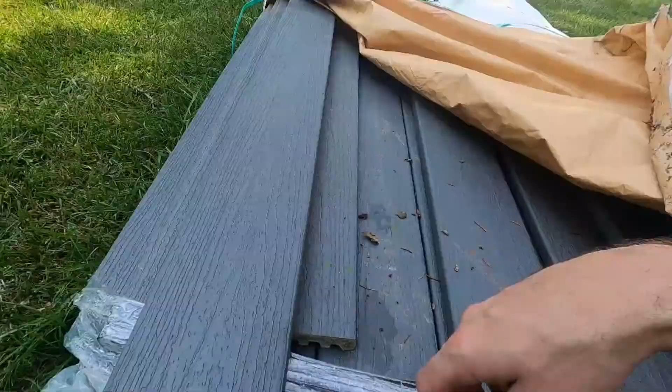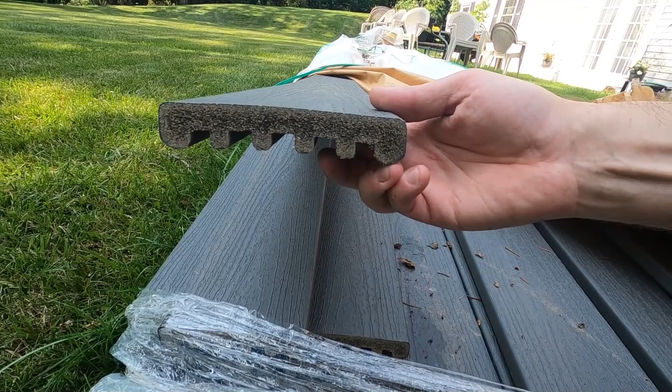Let me show you what that looks like. All right, this is the TREX decking. It does have this pattern on the bottom, so I have to be very careful about where I land things, making sure there's enough meat here to catch. I've got a big box of color-match screws. We're going to be face screwing this deck, since they did not want hidden fasteners.

So I'm probably going to do this in a couple different parts. Today I'm going to show you what's here, basically show you the framing, show you everything that's done correctly, and a couple things that I might tweak a little bit. Then the next video will be where we're actually putting it back together. They've already got most of the decking already ripped off, so I don't have to show you that.

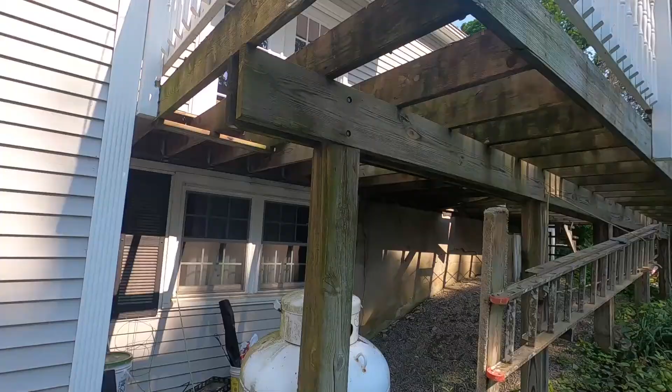So starting with the framing, this beam is okay. This is the way that they used to do it, where they notch it in on both sides. That's okay, but you lose a lot of strength when you span a distance. The way we do it nowadays is we notch it all the way in on one side and then bolt that all the way through. Then these two joists can be nailed together all the way through, making them even stronger than they are right now. So I'm not going to change that though.

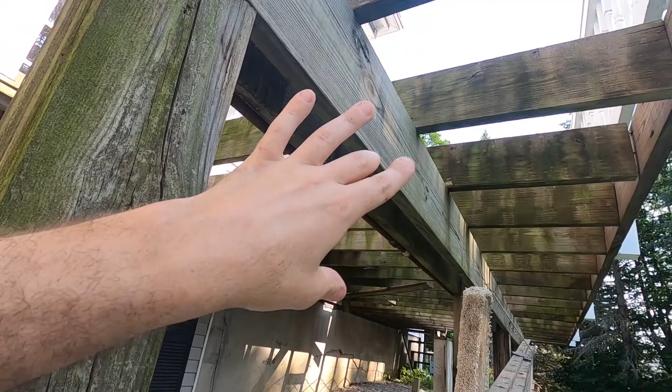This is plenty good. This deck's actually been here for 25 years. So the original deck went, well, let me show you. The original deck came to this splice here, and then they added that section on 9 years after the original deck. So from here over is apparently 25 years old, and this is a little less than that.

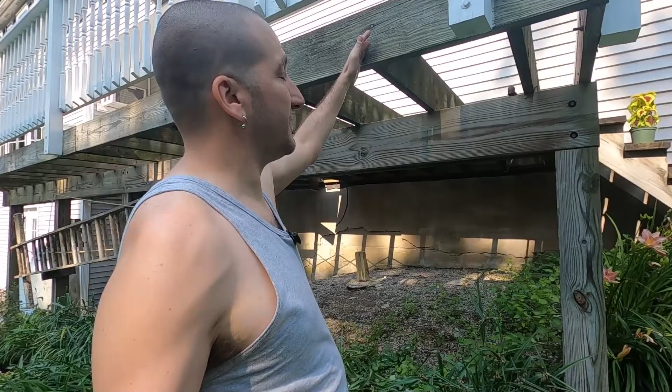What I'm gonna be doing is, because we're doing this out of TREX, this is staying for now, but down the road this is probably gonna get redone, the railings. So I'm going to build this out and run a trim board that's gonna run right over this, and the decking will come all the way out, because the way those ends of those boards are all groovy, I like to run a picture frame around the perimeter of the deck, and then you don't see all that stuff. I'll show you from up above what that's gonna look like. Basically I gotta frame all out in between all these, extend these joists by a few inches, put a board, and then run my trim board over top of that.

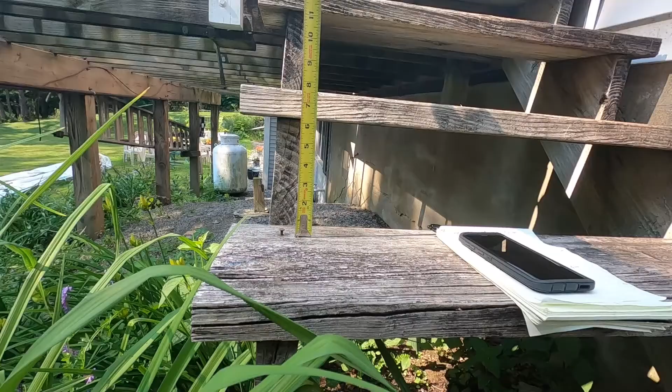Now these steps here, they don't meet code. They look like they're on a 45-degree angle, maybe a little bit less. So the steps themselves are a little narrow, they're only 9 1/4. We're gonna do 2 deck boards, which is gonna get us to 11 inches. And for the height, right now it's sitting almost at 8 inches, which is a little high, so we're gonna try to get that down closer to 7. The way this is built, the step is mounted to the deck, so it's actually flush with the decking, but really that should be down.

So when we rebuild it, I'm gonna have to frame something in down here to support it, and we're gonna drop this down so that there's a step down onto the first step.

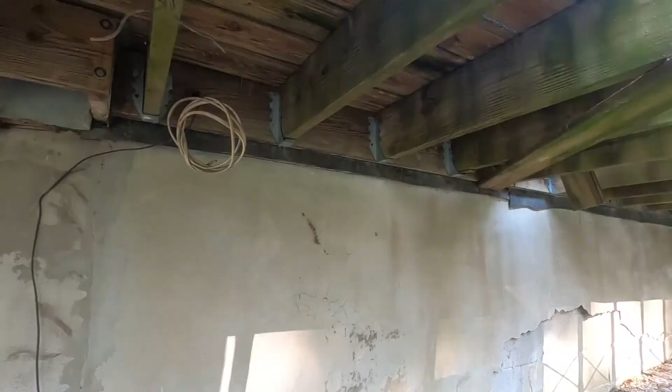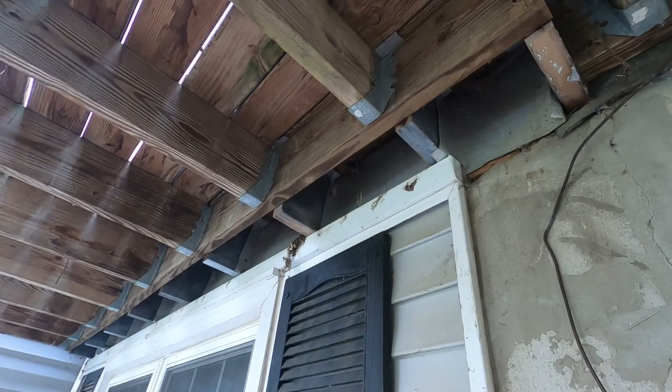This is a very strange section here. It looks like the floor joists of the house extend out, and then they attached a ledger on. So I'm not 100% sure what's going on with that, but once I get the deck boards ripped off the rest of the way, we'll figure that out. And I might have to just extend a little more flashing over, I'm not sure.

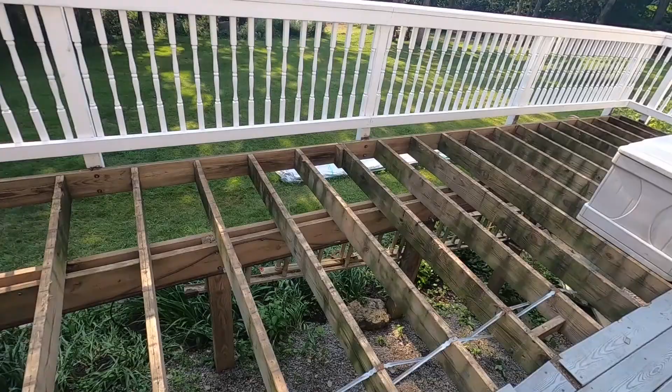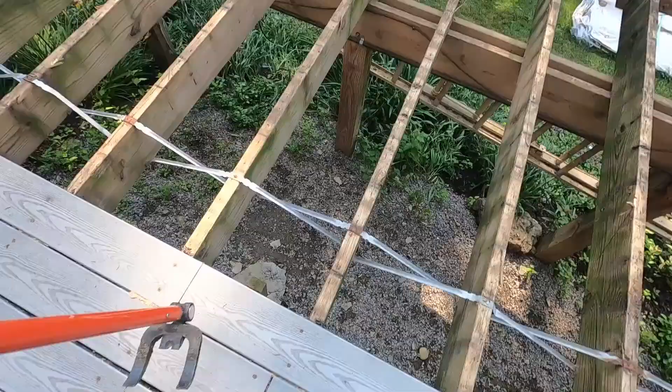All right, so here's what it looks like from up above. I was actually shocked that the joists are solid. So when they told me they wanted to redo this, resurface it, I was very skeptical, but looks like it's actually 100% doable. And if you've never seen one of these tools, they're pretty amazing.

You get it underneath the deck, and then you just pull and you'll just rip that deck board right up. This one in particular, the brand is Crescent.

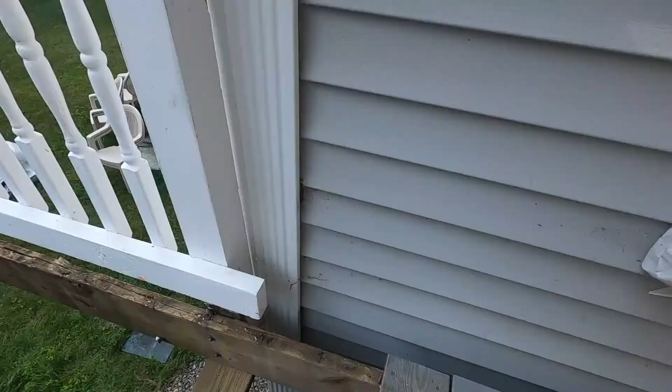And over here, the joist stops before the house. And because I'm gonna run a picture frame around, which is going to basically go right there, and then the main deck boards are gonna land ending right at the posts. So this picture frame is gonna carry through here.

So we're gonna have to tack on a couple pieces of 2x4, frame this out so that it will hold that piece. But there's no weight on this or anything, it's just gotta hold that from being able to fall in. So you can see they have some metal straps here for supports, but they don't go the whole way down. So I'm actually gonna take those out and put in full blocking, full 2x8 blocking all the way down, and that will really help stiffen up this deck a lot.

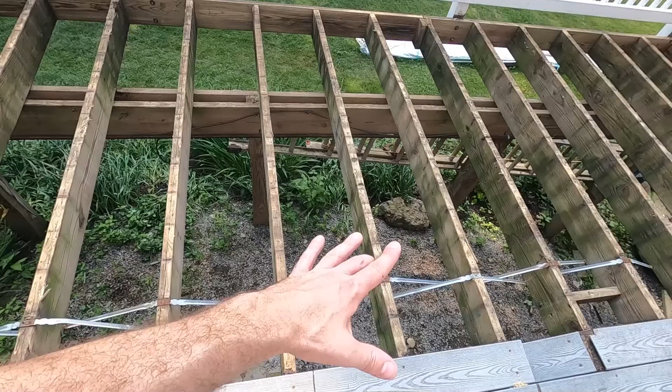All right, I think that's all I've got to show you here. Let's head back to the office, and I'm gonna draw up how I'm gonna frame out the outside so you can see what that looks like.

All right, I'm in the office. I'm gonna show you these drawings, exactly how I'm gonna do this, and try to explain it a little better. It'll make more sense in the videos when you actually get to see it happening, but let me just show you the drawings right now.

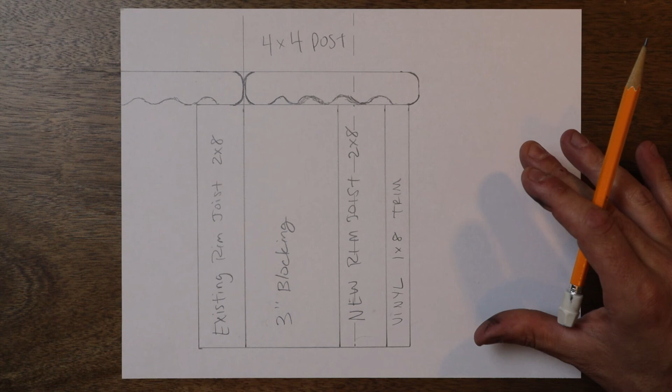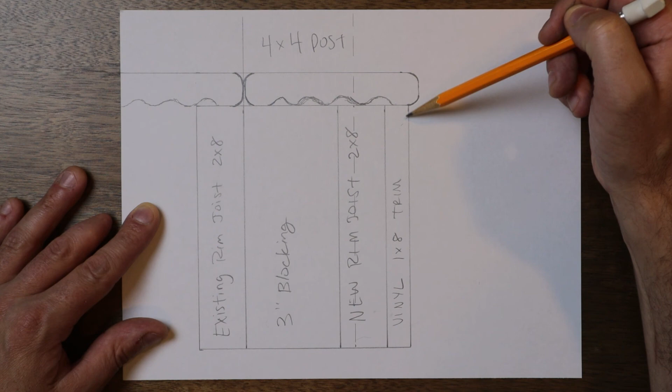Basically, here is the existing rim joist of the deck and the 4x4 post. So in order to get a deck board, what I'm doing is I'm picture framing the entire outside of the deck. So in order to get the new deck board to land exactly so that edge lands exactly on the new trim board, I had to basically lay this out with a deck board, put a trim board on, and work my way backwards.

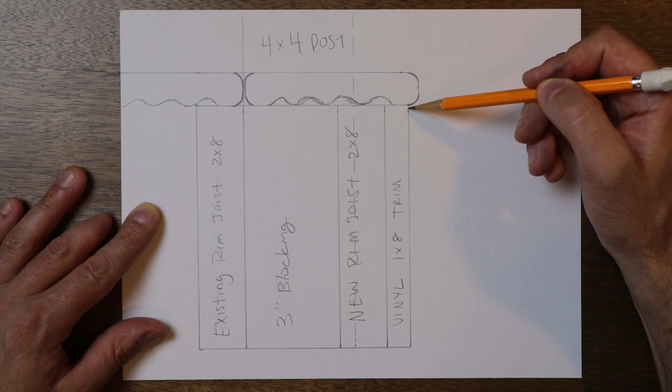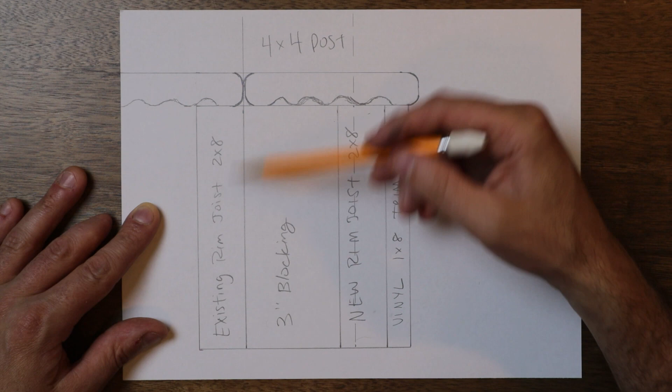So this, I forget what this was. I think it's a 1/4 inch here, and then a 3/4 inch board, and then a 2x8 new rim joist, and then a 3-inch block. So this is a 2x8, and then basically a 2x4 ripped to 3 inches. I'm actually gonna run it the opposite direction, because if you run the grain this way, it's just gonna split.

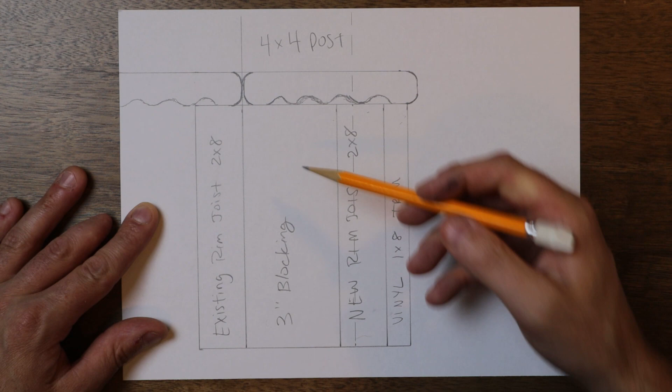So I'm going to use a 2x4, rip it to 3 inches, and then cut it to 7.5, and then a 2x8 and the trim board. That's what this is going to look like, blocked all out. I'll show you that when we do it, and that'll be in the next video, so check out the next video to see exactly what this looks like.

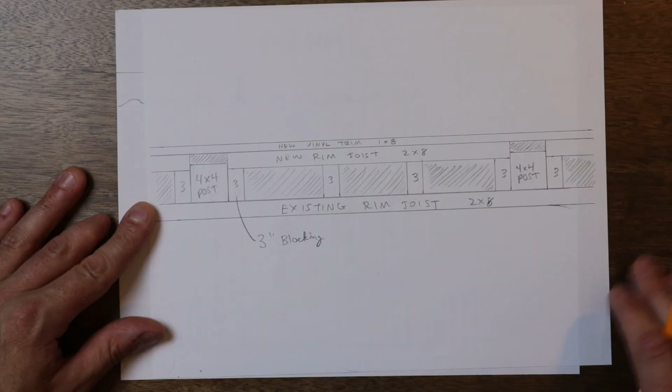Okay, so this is an overhead shot of the same thing. Here's a 4x4 post, and here's a 4x4 post, and this is the existing rim joist. So what I was talking about was putting a 3-inch block. This is a 2x4 ripped to 3 inches and cut to 7.5, so it matches this.

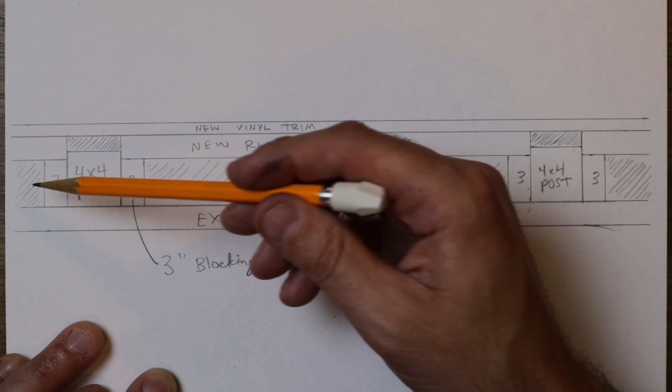And it's weird, the old ones are 7.5, the new ones are 7.25, so pressure treated framing's all over the place anyway. So it's going to be a 3-inch block, and then the new rim joist—you see here's a space, these darker spots are the spaces. So there's going to be a 3-inch block on either side of the post, and then the new rim joist and the vinyl trim. So the new deck board is going to span from here to here.

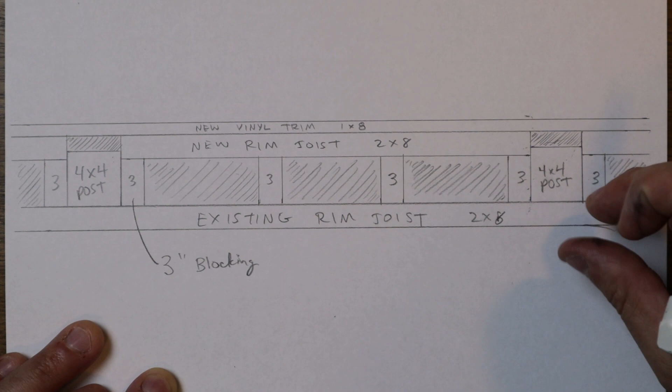The picture frame is going to overhang that a 1/4 inch. And then the inside deck board will be here, along the front of the deck, and on the sides of the deck they run perpendicular to that. So they will run and die into that.

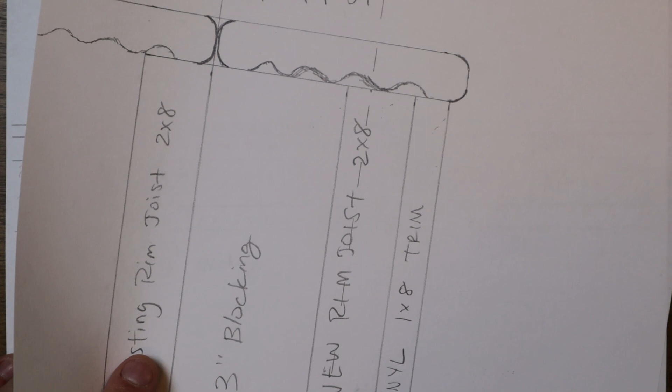The reason I do a picture frame is if you just run these things and cut them, the ends of those boards look like this—they have all this little groove on the bottom of them. So you don't want to see that when you're looking at the edge of the deck. That's why I run a picture frame all the way around, and then you butt them up to the picture frame.

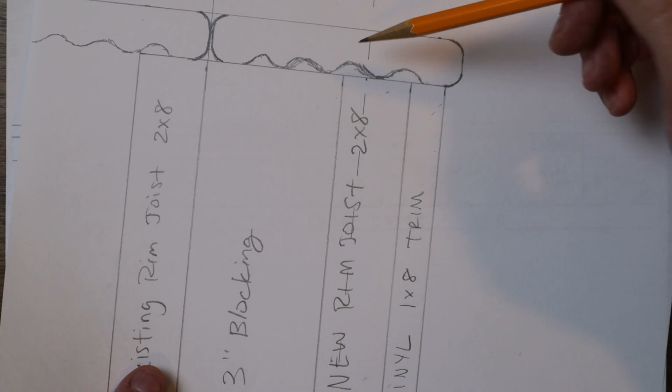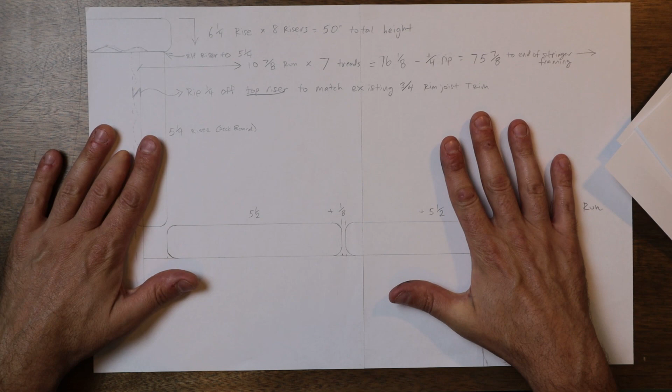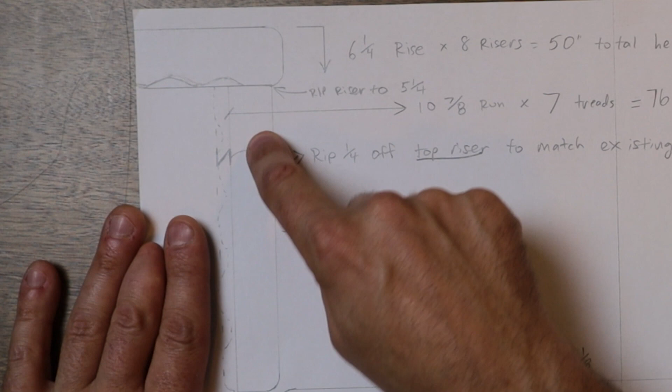All right, I also got all my stair drawings here, but I'll get into this in the stair stringer video, how I do the stairs. But you can see, this one is to scale, this drawing right here is to scale. So there's this 1/4 inch little round over here, and that's what I was talking about—it's going to have to land right on the outside trim board that's 3/4 of an inch thick. So anyway, we'll get to this in a later video.

All right, so hopefully that made some sense. It definitely makes sense to me. It's hard for me to try to explain it without actually showing you. But in the next video, I'll show you exactly how that's all assembled, and it hopefully will make a lot more sense.

So this was the precursor, and then you'll see the framing will be in the next video, and then I'm going to do a video on the stairs themselves, and then probably a wrap-up video to show you everything all at the end, completed and done.